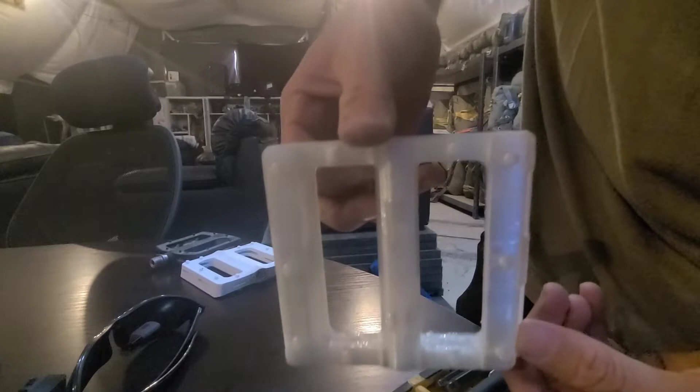This is just regular PLA, just to see how strong it would hold up. This is eSun PLA clear. Like I said, it's just regular PLA, and you can see I snapped it right there pretty effortlessly.

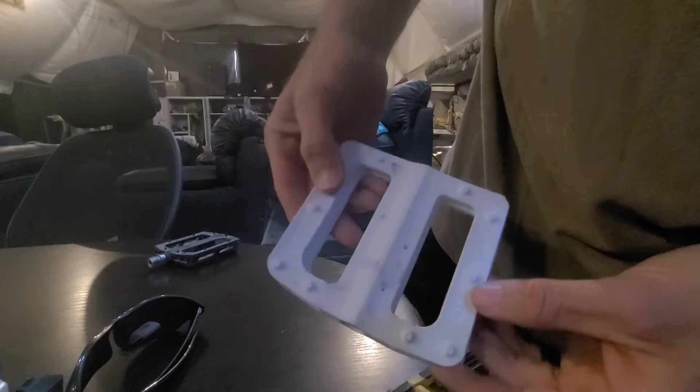Moving on, this is PLA Plus, also made from eSun. The design itself is also a little thicker, and you can just feel it's way more sturdy. And finally I moved on to PLA Tough.

But here's the final design I came up with. I think I printed about 6 or 7 pedals before I finally got the internal dimensions correct.

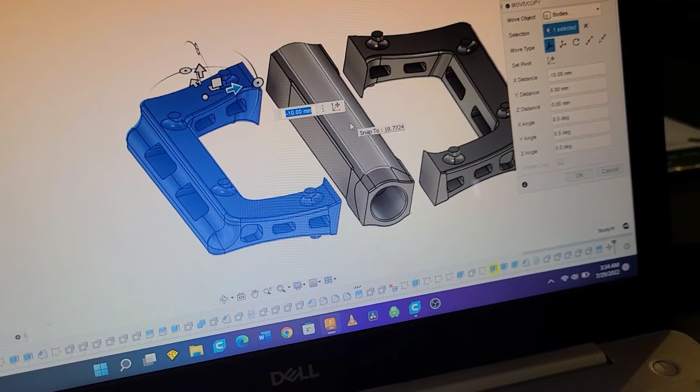What I would do is cut the pedal up into pieces like you see. That way all I had to do was print just the middle piece, and I don't have to waste too much plastic. And then the ends I can cut up where the thread is and where the spindle part is, just to get those ends perfect.

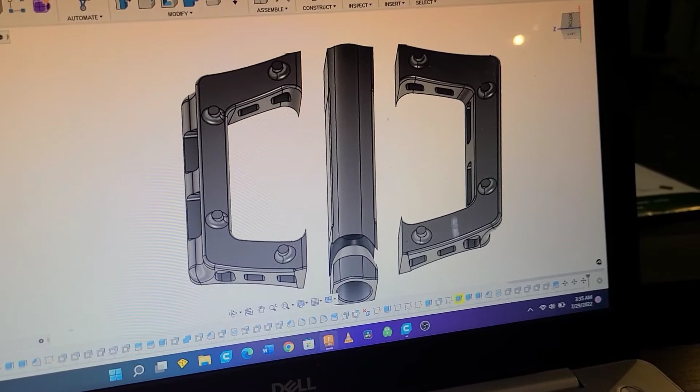So that's how I was able to save plastic and time, just cut up the model. Once I get everything dimension-wise perfect, put it back together, and then I can 3D print the whole thing as one piece. So here's the final version of it actually fitting correctly.

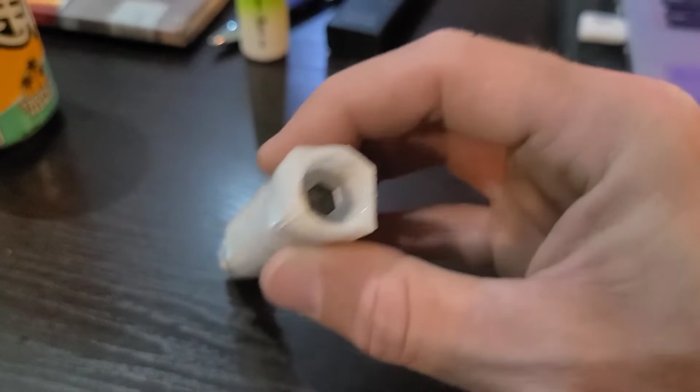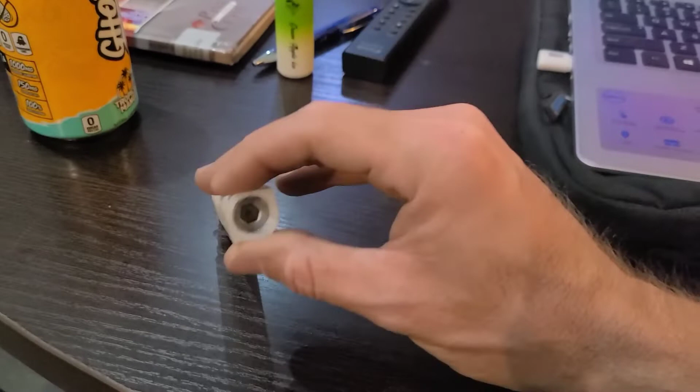There's no play, it spins perfectly, bearings fit perfectly, and then the threads - I use this little piece to get the threads perfected for this little piece that mashes everything together, and that also works out perfectly.

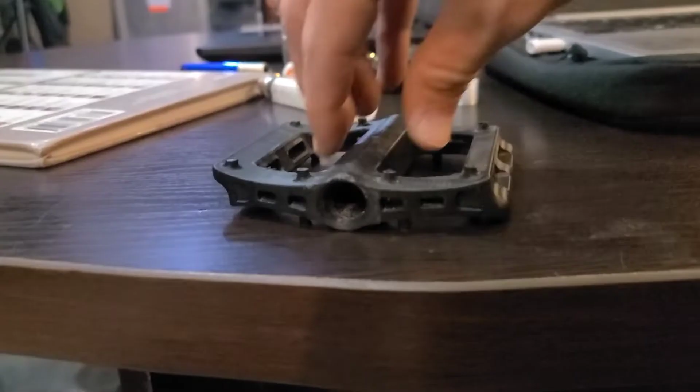And so here's the final version in PLA Tough, made by Inland, and as you can see here, all the pins are level with each other.

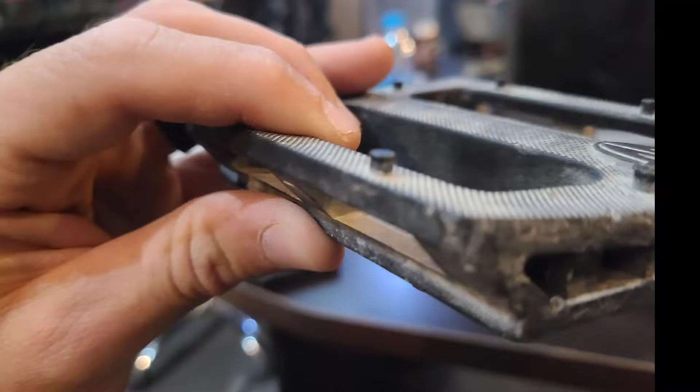Here's the premium slim pedal. You can see I have fillets on the bottom of my pins, whereas their pedal does not.

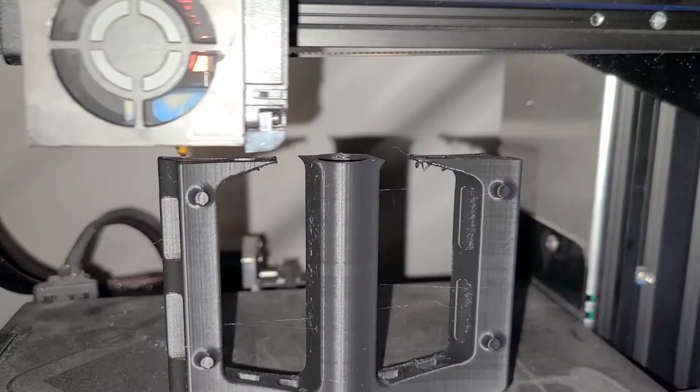So 6.5 hour print, and I decided not to use any supports just to see how it would turn out. And this is how it looks without supports. You got a little bit of overhang, but for me, it's worth it to just print it like this without supports.

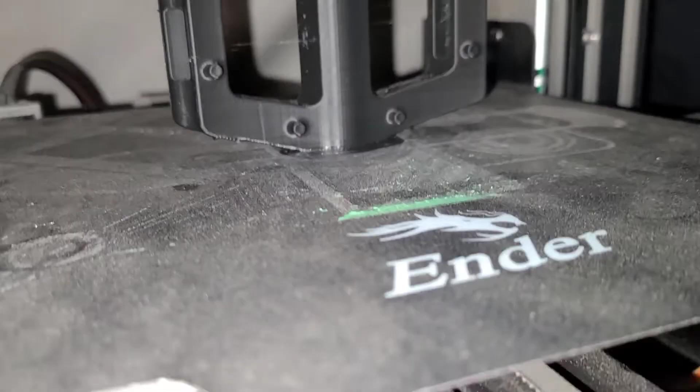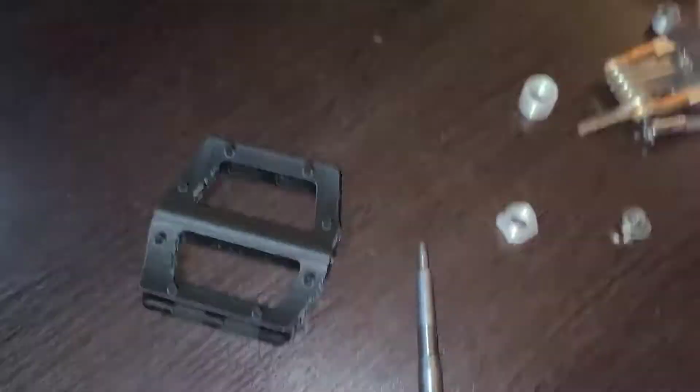I did print a little brim at the bottom just to give it a little more stability so it doesn't fall over while printing from the bed shaking around so much.

Alright, and then here is the final test fit. This is the final version that finally everything fit correctly with no play.

And right here you see me just putting the bearings in and then tightening the bearings onto the spindle.

So right now there is a little bit of play left and right, and then this little guy threads into the pedal itself and then pushes the bearings up against an internal piece of the pedal, which removes all that play.

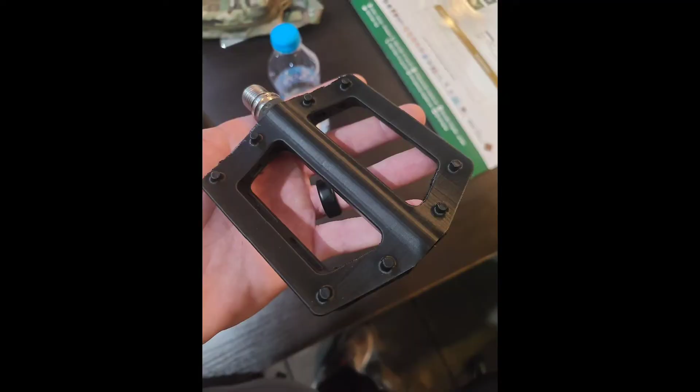So there you have it, the final version.

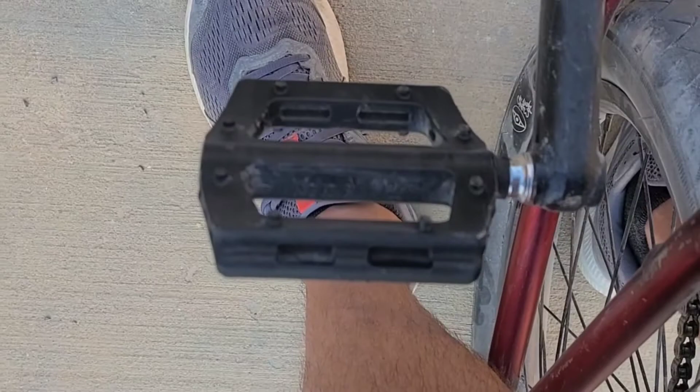I made this as thin as possible. It's about 3 millimeters thinner than the premium slim pedal that I ride. And you can see here, I only did one side so that I can compare the two. And here is my test to see how strong it is.

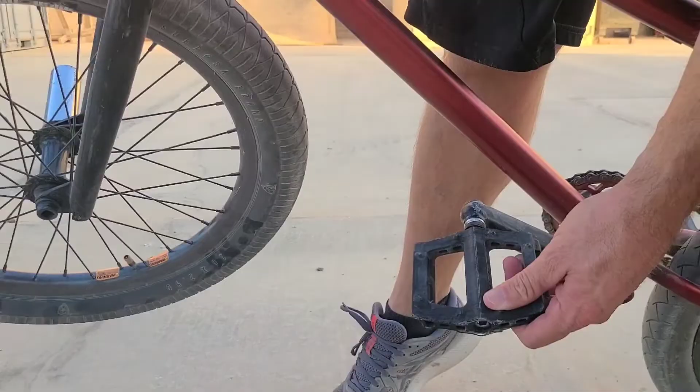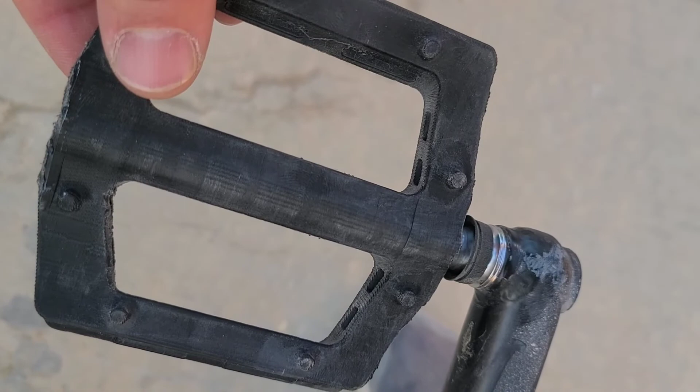Okay, so as you can see, the threads are what broke internally on the pedal, causing it to be a little loose. It's still rideable, and all I have to do to fix it is take a second little nut piece as a dust cap, basically put on the end of it. That way that will be what strikes the ground and there will be no room for it to move. Also, I'm going to readjust some of the internals, but as you can see, it's still rideable.